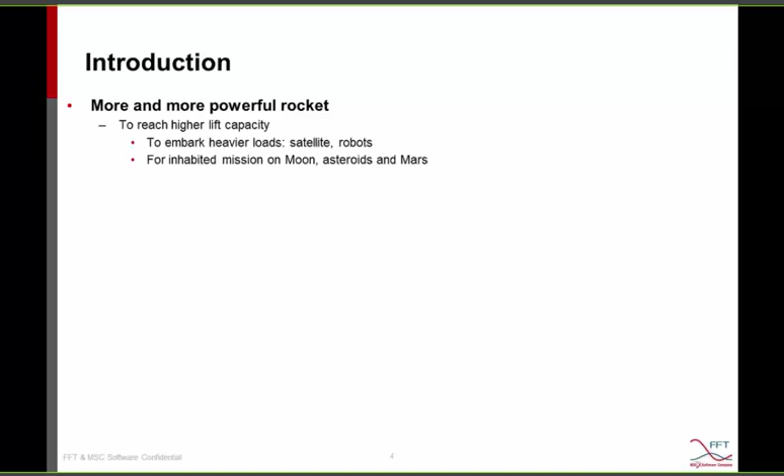Because the aerospace industry is very diverse, with a multitude of commercial, industrial, and military applications, and for competitive reasons, more and more powerful rockets are required in order to reach a higher lift capacity or in order to go further in space. For that reason, the launch is a determinant point to leave the Earth, and very high pressure levels are generated around and in the vehicle.

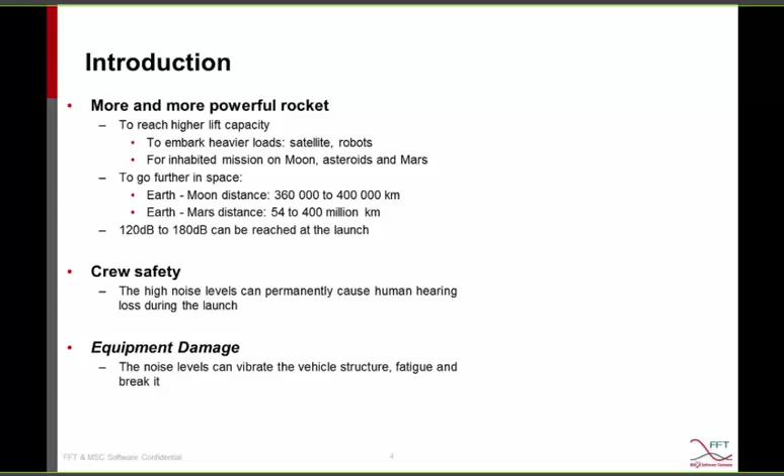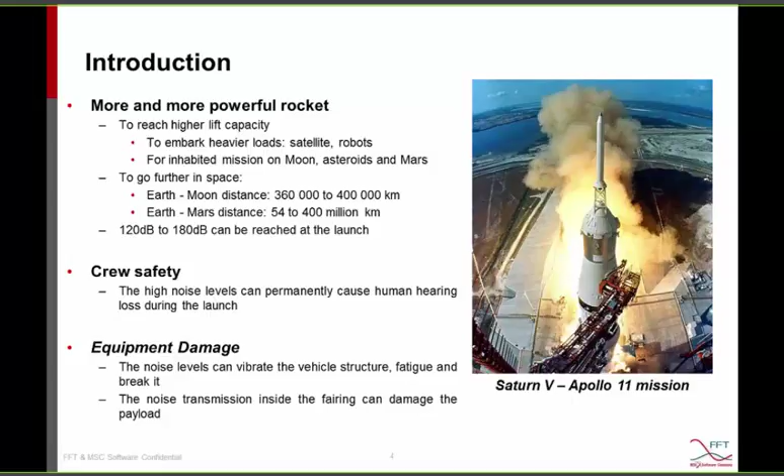120 to 180 dB can indeed be reached at liftoff, impacting the health of the crew, because such acoustic levels can permanently damage the human ear. In addition, it submits the structure of the launcher and the high technology components embarked to intense acoustic fields. These induced vibrations can first damage the vehicle, but also the payload components. So the main challenges of the aerospace industry are therefore to model vibro-acoustic problems and predict the vibration levels of structures submitted to intense pressure loads.

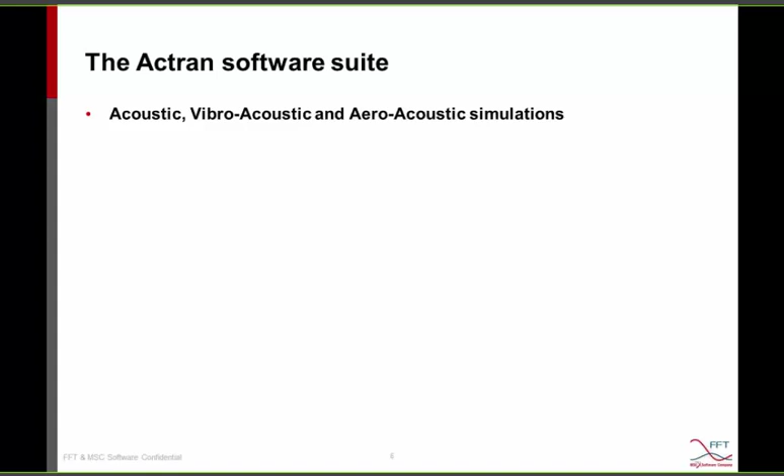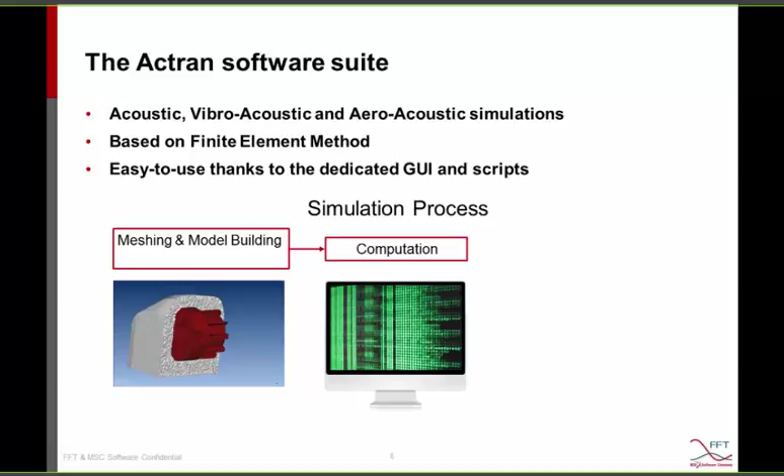As a perspective, I first want to show you that Actran is a dedicated tool for the aerospace industry. Actran is indeed a dedicated tool for pure acoustic, vibro-acoustic, but also aeroacoustic simulations. Based on the finite and infinite element method, the software is easy to use thanks to a dedicated graphical user interface called Actran VI that is constantly improved and for which every action can be registered and scripted in dedicated sessions. The simulation process starts first with the mesh and the model building, for which we include meshing functions. Then, this is followed by the solver, in which high-performance computing solutions can be used for reducing the cost of the computation. Finally, the post-processing is available in the same graphical interface, where a lot of operators and outputs can be displayed.

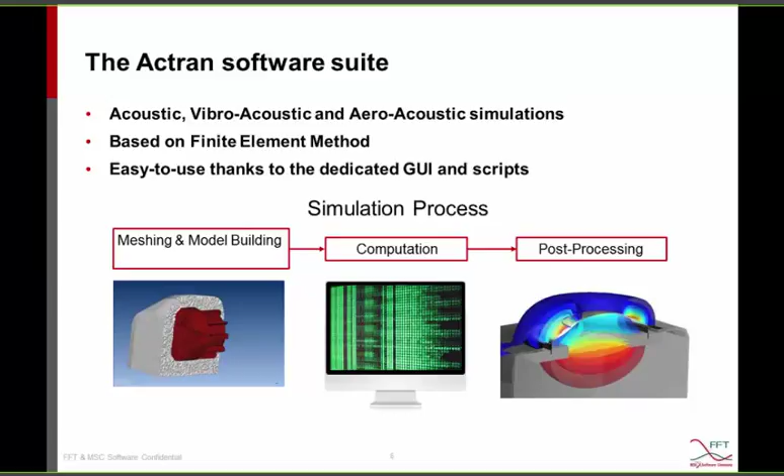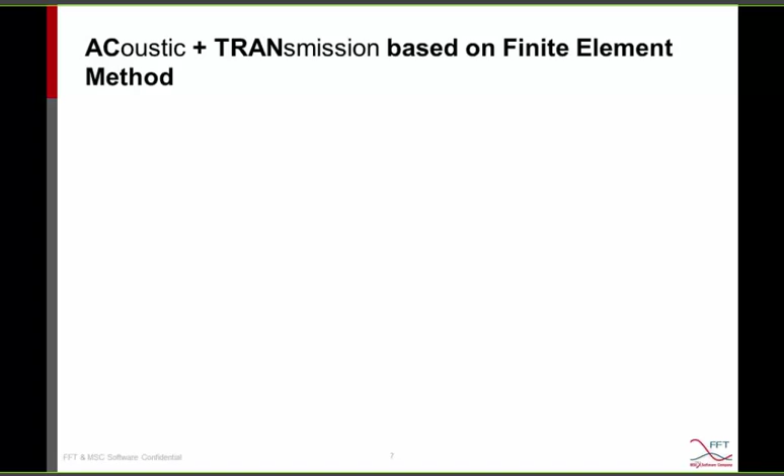To go further, Actran stands for acoustic transmission based on finite element method. Firstly, the fluid is modeled with volume elements for the near-field representation, and free-field radiation conditions are available. First, the far-field can be modeled with infinite elements, and secondly, a perfectly matched layer is also available for reducing the cost of the model, especially at high frequencies. Complex structures can be included in a fully coupled model with light or high damping, including a single layer or several layers. Composite materials are also available for which the properties of each ply can be defined separately, and finally connection elements can also be used.

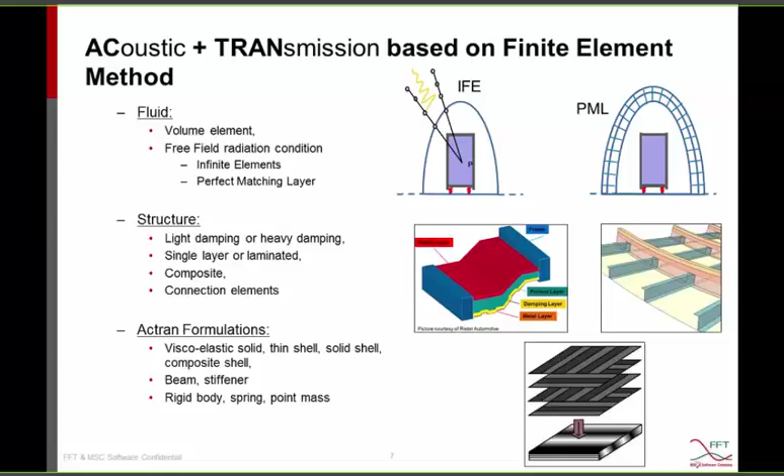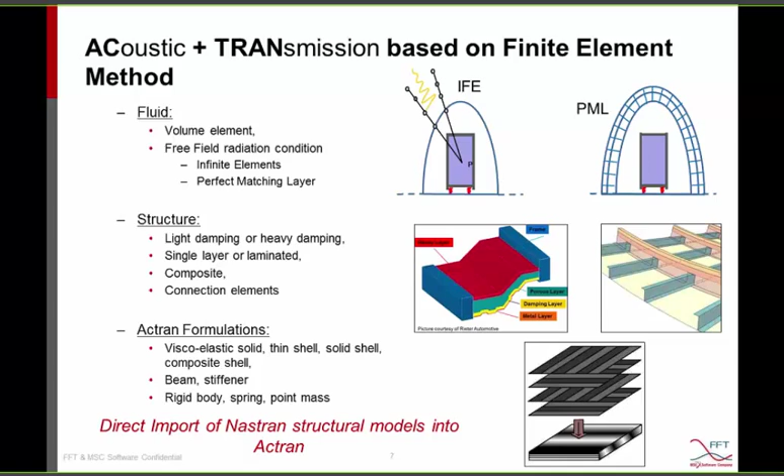Regarding the Actran formulations, different solutions are available like viscoelastic solids, thin shells, solid shells or composite shells. Beams and stiffeners can be modeled, and rigid bodies, springs and point masses are available with the same formulation as MSC Nastran cards. As an important remark, the dedicated tool Nastran to Actran allows to directly translate a Nastran analysis into an Actran model.

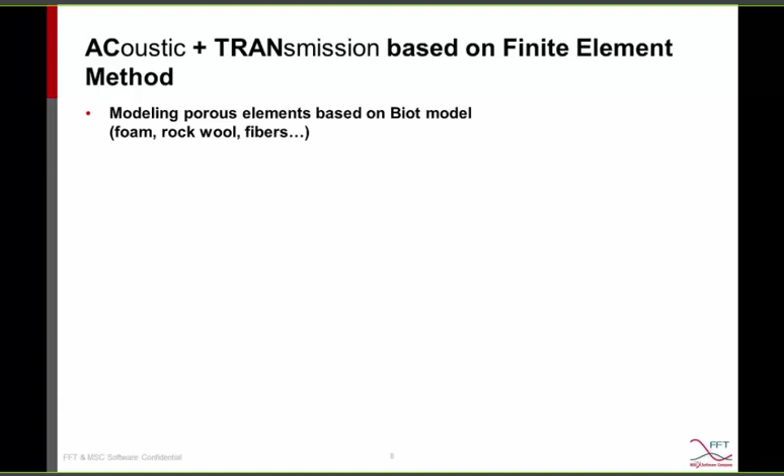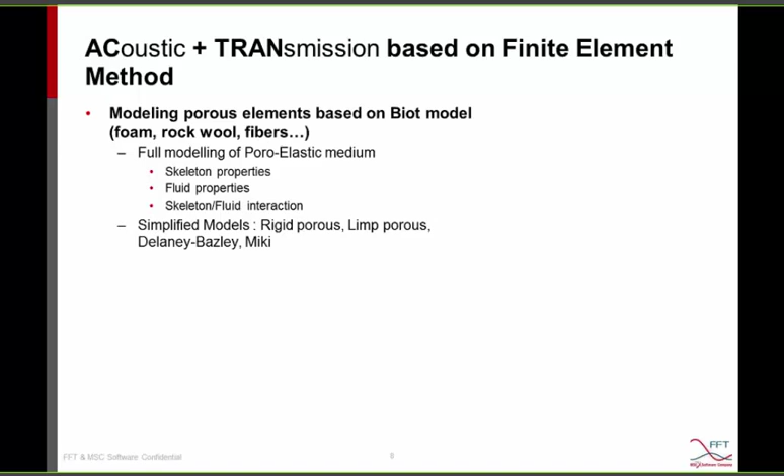Specific to the acoustic modeling, Actran includes porous elements based on the Biot model for representing foam, rock wools, or any other type of porous medium. Both the full modeling, including skeleton and fluid interaction, and simplified models are available depending on the material properties of the porous medium. In addition, isotropic, but also anisotropic materials can be modeled. The dissipated power is accessible in each porous medium, allowing to easily access the percentage of the dissipated power in a multilayered material. Finally, any type of material properties can be frequency dependent, and therefore fit experimental measurements of the porous medium properties.

So in general terms, Actran is the dedicated tool for vibro-acoustic problems. And now I'm going to show what the vibro-acoustic challenges for aerospace applications are and what to do for modeling them. I'm going through the different types of external noise sources and the corresponding challenges in the numerical modeling. First, an exterior acoustic field is generated at liftoff due to the engine noise. This excitation can be seen as a broadband and random acoustic pressure. This excitation is equivalent to a diffuse field, actually.

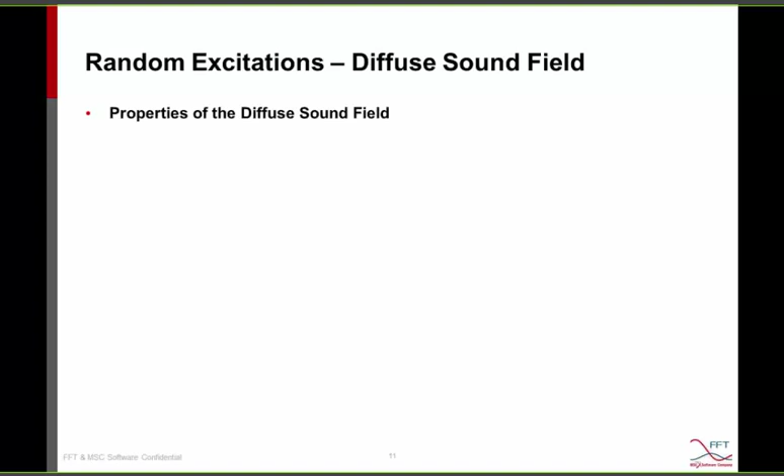The diffuse field is a random process for which the mean square pressure is the same at any point in space. In addition, for the flow of acoustic energy, all directions are equally probable. This excitation is equivalent to the acoustic field generated in a reverberant room by an omnidirectional source, for instance.

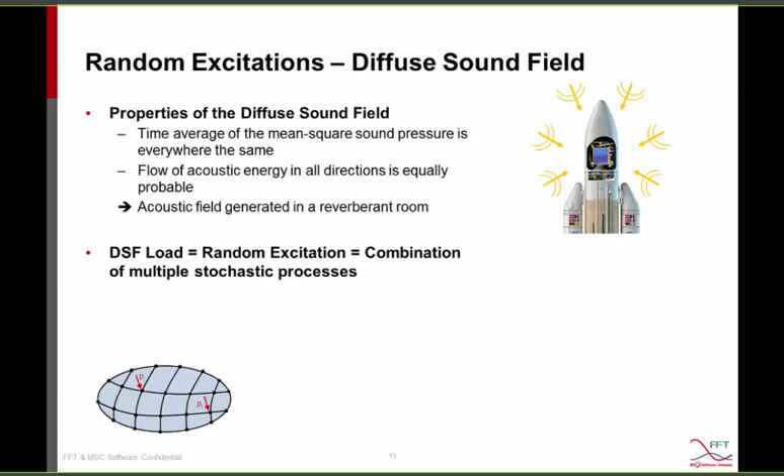For the numerical modeling, the diffuse field excitation along the external surface of the structure is applied to all the points of the finite element surface. And it is made of a combination of stochastic processes. Firstly, a reference spectrum is defined in terms of PSD spectrum, and this one can be frequency dependent. Actran is also compatible with sound pressure levels available directly from measurements. Secondly, cross-PSD functions represent the interdependency between the processes using analytical formulations. So the global diffuse field is made of these two representations.

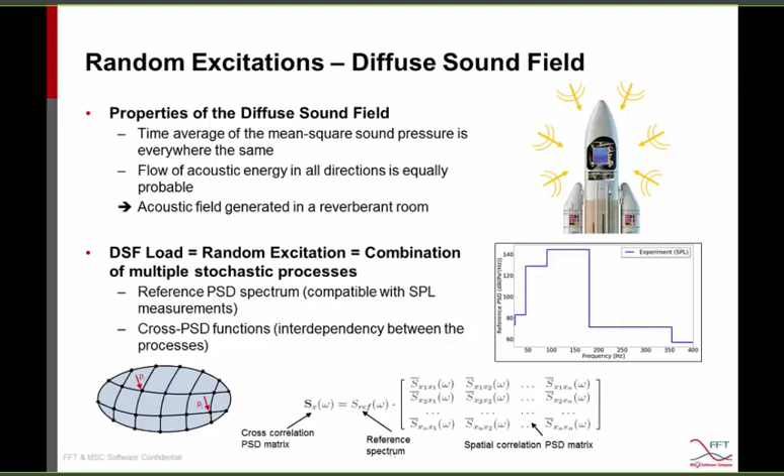Then, the second source of vibration is not acoustic this time, but is an aerodynamic load due to the pressure fluctuations along the vehicle. These ones come from small turbulent fluctuations in the boundary layer, which are predicted with a turbulent boundary layer model. As a second type of random excitation, Actran includes turbulent boundary layer models.

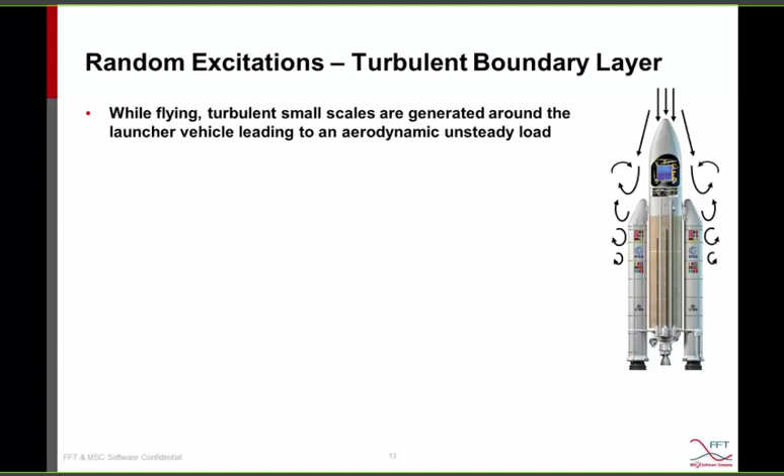Indeed, while flying, turbulent scales, which are small, are generated around the launcher vehicle, leading to an aerodynamic unsteady load. These pressure fluctuations are transmitted inside the fairing via the structure. The turbulent boundary layer is actually modeled like the diffuse field I just described previously, and is also seen as a combination of multiple stochastic processes based on reference PSD and cross PSD functions.

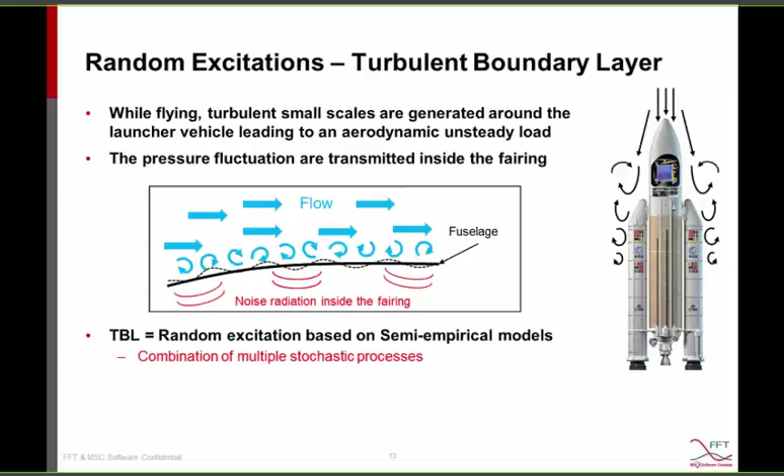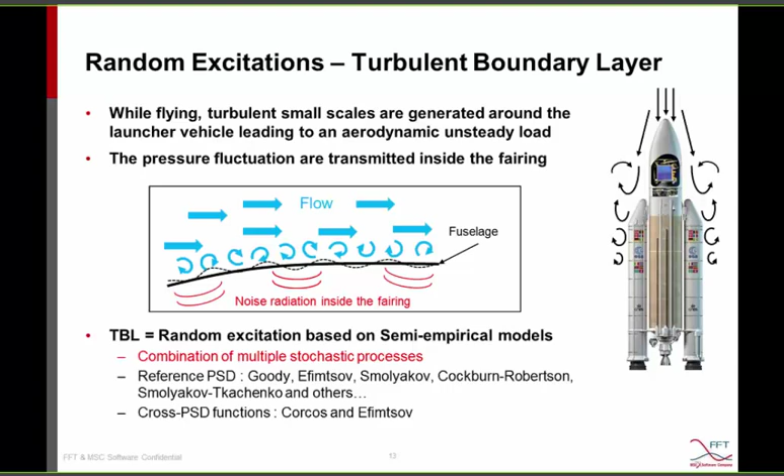The difference is that the TBL relies on semi-empirical models. I provide a list of the reference PSD models available in Actran. The Cockburn and Robertson model is especially based on experiments of spacecraft panels subjected to in-flight fluctuating pressures. On the other hand, the cross-power spectrum comes from the spatial correlation functions, either described by the Corcos or Efimtsov model.

Finally, the third type of external source is the structure-borne noise due to the structure vibration and the acoustic transmission. For that purpose, the acoustic insulation performances can be predicted via transmission loss and noise reduction index studies. In addition, the vibration levels and the induced constraints can be predicted and coupled to an acoustic fatigue analysis.

Now, if I have a look inside the fairing, I also remark that the carry-on component should be studied carefully. Indeed, all the types of external sources described previously are transmitted inside the fairing, and the embarked satellite, for instance, is also submitted to intense acoustic fields. The first specific modeling challenge inside the fairing is therefore to represent a broadband random acoustic pressure that includes, in that case, some specific masking effects.

Indeed, the position of the embarked component inside the fairing has its importance on the repartition of the pressure field along the structure surface. The masking effect is actually due to the installation effects, and the diffuse sound field I described previously cannot be directly applied along the whole satellite surface. I take a small example to have a look at an arbitrary geometry placed in a reverberant room. Because of the geometry of the structure, there are external surfaces that are not loaded by the incident acoustic field. These surfaces are masked because of the geometry of the structure.

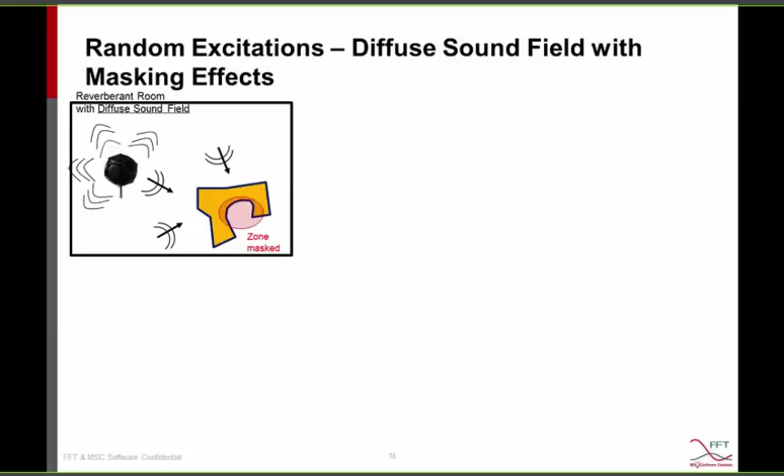The diffuse sound field excitation in Actran actually makes the distinction between the conventional model and the diffuse sound field including masking effects. In the conventional model, described in the previous slides, the excitation is applied directly along the external surface of the structure. The reference PSD and cross PSD are described by analytical formulations without taking into account the masking effects. To include the masking effect, the surrounding fluid should be modeled with finite elements.

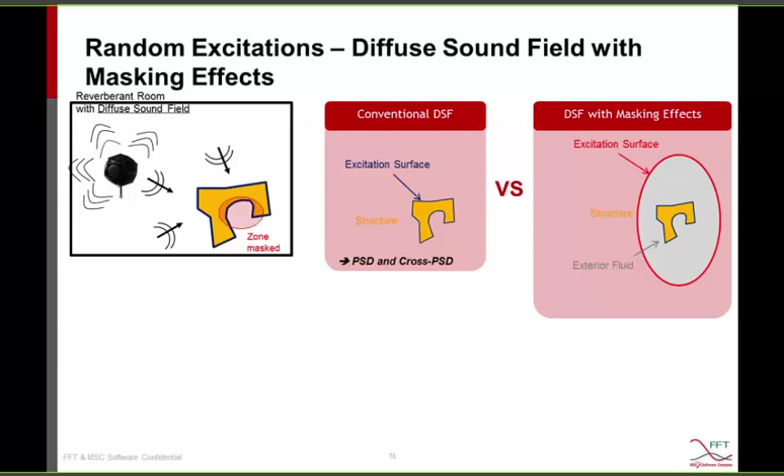The diffuse sound field excitation is then applied along the infinite surface, and for that purpose, the diffuse sound field is represented by a superposition of a high number of incident plane waves with different orientations. The generation of the plane waves is automatically done around the structure and equally spread around a reference sphere. The random character of the excitation is then modeled by sampling random phases of the excitation.

The random excitation therefore becomes the combination of different deterministic results for which the phase of the plane waves changes. One realization of the random process provides one result, and the PSD values are obtained by summing the squared results. Therefore, the convergence of the PSD result depends on the number of samples considered during the Actran computation. I draw your attention to an important point with the sampling process. Only one Actran calculation is needed thanks to the multiple load analysis.

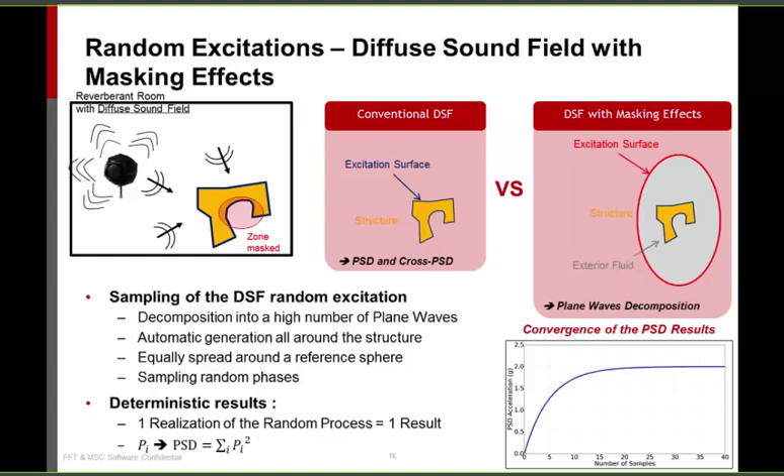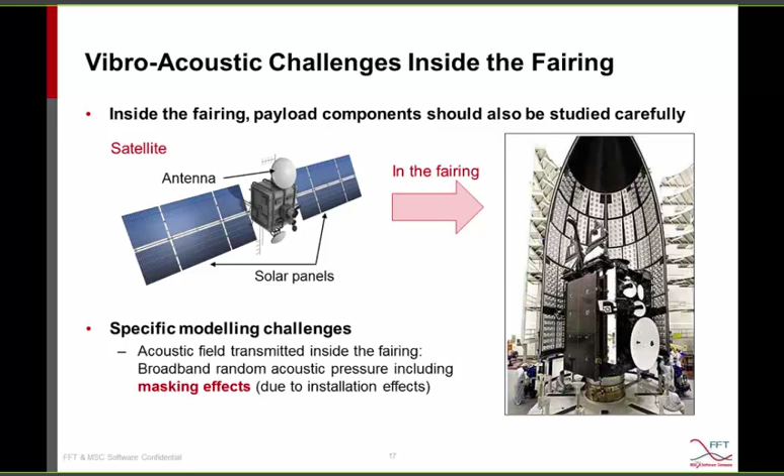The second specific modeling challenge inside the fairing concerns the viscothermal effects induced in thin air layers. Indeed, neglecting the viscothermal effect could lead to an overestimation of the acoustic pressure excitation along the structure and therefore predict high vibration levels and maybe the structure break, although the structure was originally well dimensioned. When the dimension of the problem becomes very small compared to the acoustic wavelengths, viscous and thermal dissipation actually occurs in the fluid. The acoustic waves are locally slowed down and damped out, and these effects are important in small cavities or thin air layers.

The main challenges of the numerical modeling are to be able to compute these effects in arbitrary geometry with an efficient computational process. The distance-based linearized Navier-Stokes Fourier model should be used for any type of 3D geometry at rest. It makes an approximation of the viscous field using a pre-computed wall distance field. The first step computes the wall distance field, which is very rapid inside Actran, and the second step computes the acoustic propagation, including the viscothermal losses.

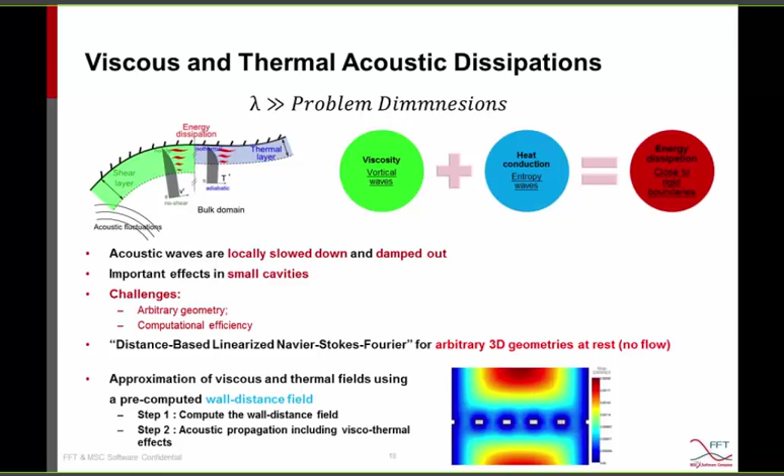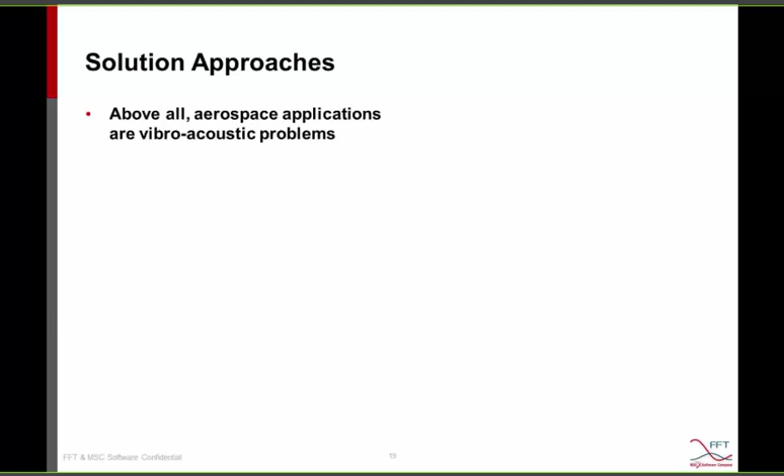So I have demonstrated that, above all, aerospace applications are vibro-acoustic problems with numerical modeling challenges. Once the numerical model is built, there are different solution approaches for solving it. First, the direct frequency response is useful for complex and high structural damping models, including porous materials, for instance. This approach better suits predicting the acoustic transmission performances of multilayer materials because of its cost.

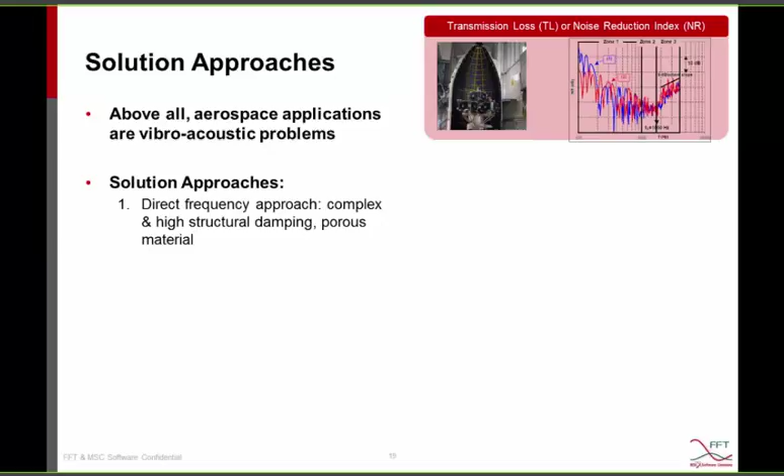The modal frequency response is useful for reducing the cost of direct computation and solving large structures with low damping and without porous media. Finally, the hybrid frequency response merges the benefits of the direct and the modal approaches for solving a fully coupled vibro-acoustic problem, including the modeling challenges specific to the aerospace applications.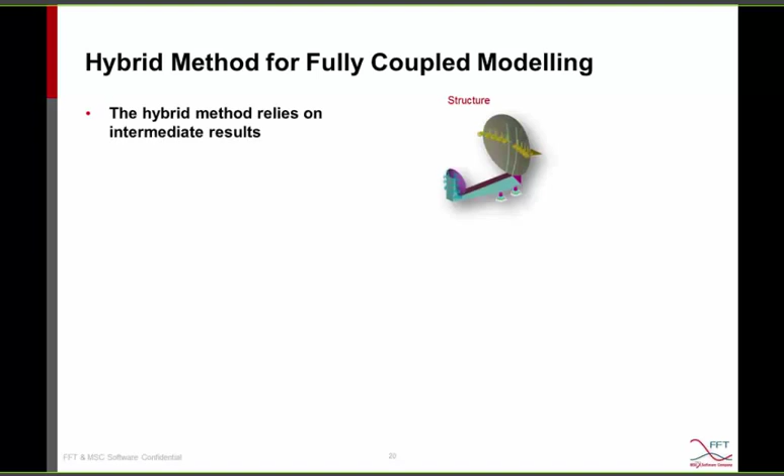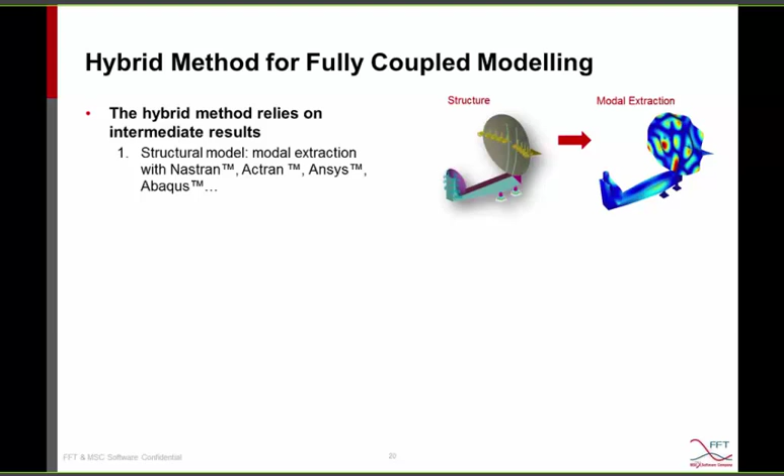To see in deeper detail what the hybrid method in Actran is, it actually relies on intermediate results provided by external tools for modeling the structure. The structure is in the modal coordinate system thanks to a modal extraction analysis that can be performed with external tools like Nastran, ANSYS or Abaqus. The structure is then imported in Actran and the model is made more complex by including specific acoustic excitations and components. For instance, viscothermal effects and masking effects are included in the Actran analysis and modeled in the physical coordinate system.

Finally, a hybrid calculation is performed with Actran for a fully coupled vibroacoustic study, including a structure in the modal coordinate system and acoustic components in the physical coordinate system. Thanks to our automatic and adaptive acoustic components, the exterior field is not necessarily meshed by the user. Indeed, included meshing tools are available in the graphical user interface and in the Actran solver.

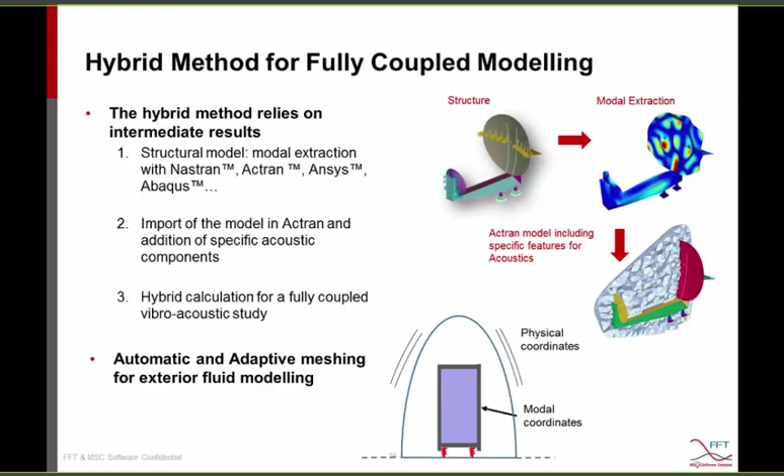I make a small parenthesis about the simulation process for acoustic fatigue that could be useful for aerospace applications. The output of the Actran computation, resulting from a modal frequency response including a diffuse sound field excitation, could be used in the MSC Fatigue software for computing the durability of inner components based on the predicted stresses.

Two case studies are presented in this section. The first case was studied in collaboration with EADS. It consists in modeling the equipment bay of the Ariane 5 vehicle submitted to a diffuse sound field in the modal coordinate system, and we compare the predicted vibroacoustic response to experimental measurements at several accelerometer locations. We published a paper at the ECSSMT conference where we demonstrated a very good correlation with the measurements up to 2000 Hz.

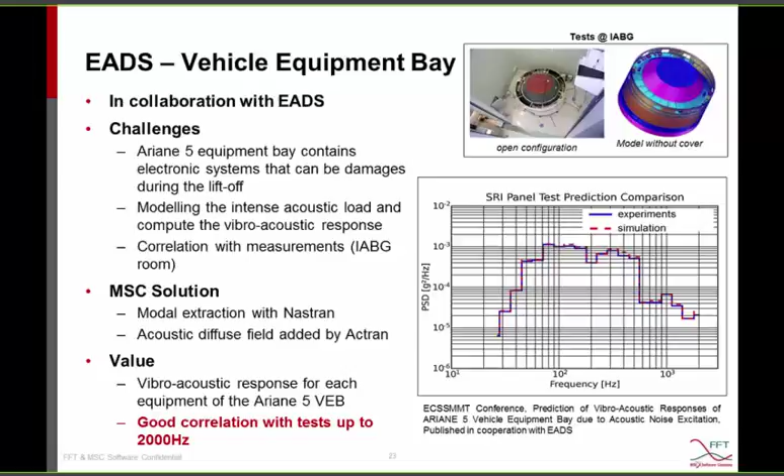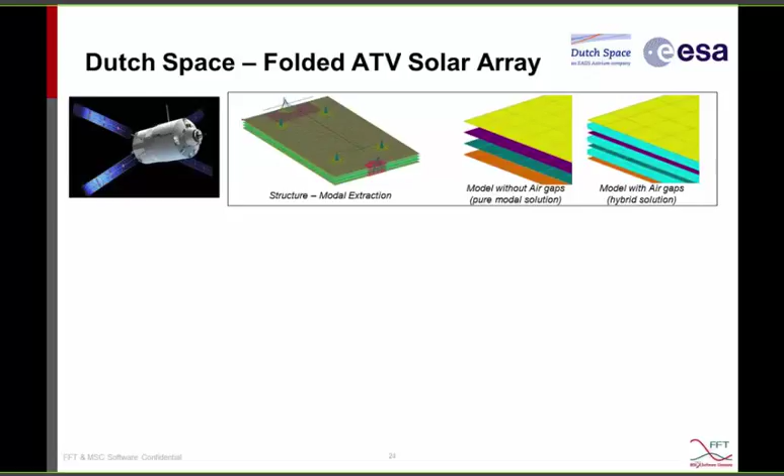The second case was studied in collaboration with Dutch Space. It consisted in modeling the structure of the folded solar panels inside the fairing. A modal extraction of the structure was performed, and we compared the results without and with the modeling of the viscothermal losses in the thin air layer present between the panels. The diffuse sound field was applied along the structure's surfaces without masking effects at first, and two types of boundary conditions along the free surface of the air layers were studied.

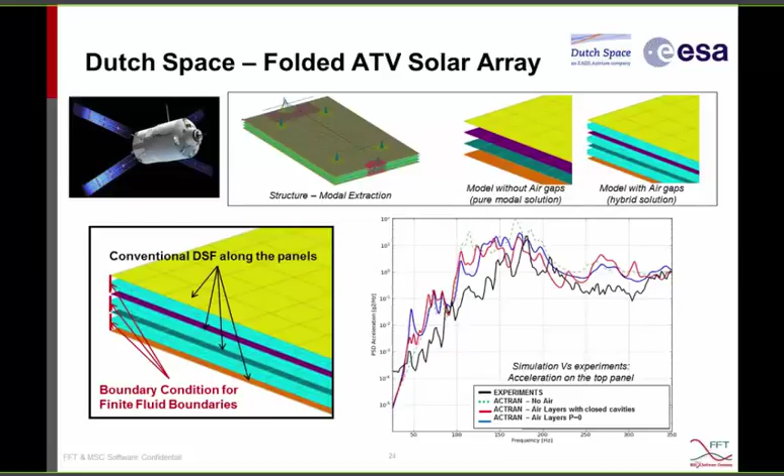We first identified the influence of the air layer modeling that reduced the vibration levels measured at the acceleration points. So with the air layer, let's look at the blue curve, compared to the model without viscothermal losses, that is the green curve. However, the first results were originally high compared to the measurement in black, even if we identified that the viscothermal effects have their importance.

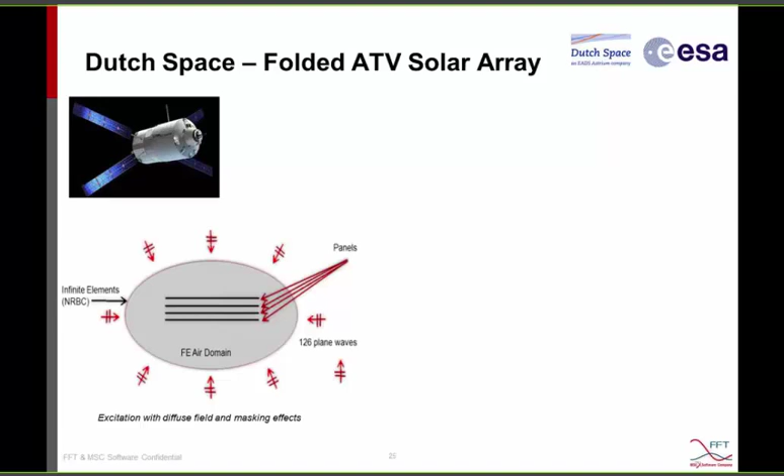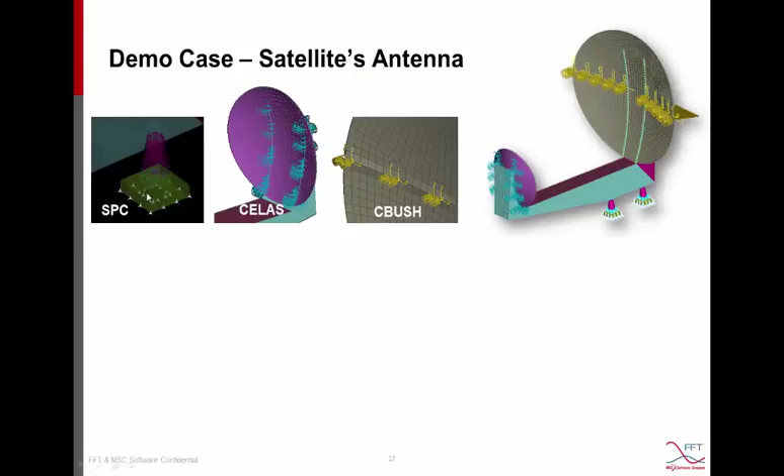As a demonstration case, I have chosen a simplified antenna for illustrating how to model a fully coupled vibroacoustic problem, including masking effects in the diffuse sound field excitation. The antenna is first modeled in MSC Nastran and contains different components. Shells and composite properties are used for modeling the structure in 2 dimensions. Connection elements are included with CELAS and CBUSH cards. And the degrees of freedom are fixed with SPC cards that constrain the displacements and rotations to 0 for ground nodes.

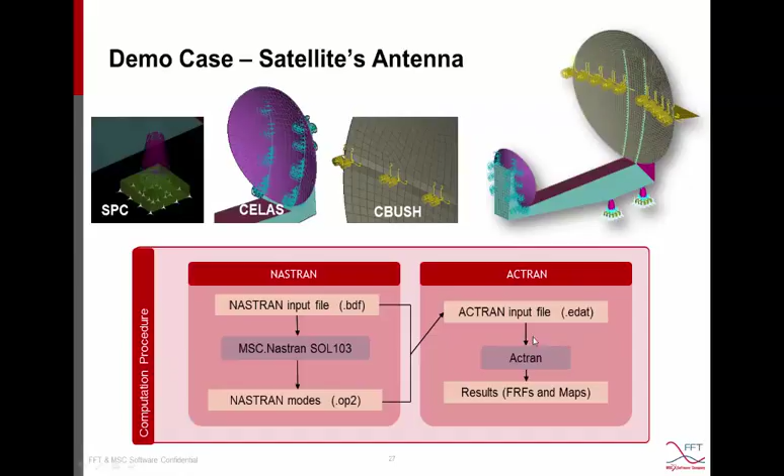The modal extraction is performed with MSC Nastran using a SOL 103. The modes are stored in an OP2 database that is called the modal basis. This modal basis is then included in an Actran computation in which specific features for acoustic modeling are used. The Actran model therefore starts from the Nastran modal basis and the Nastran mesh of the structure, and the structure is fully represented in the modal coordinate system.

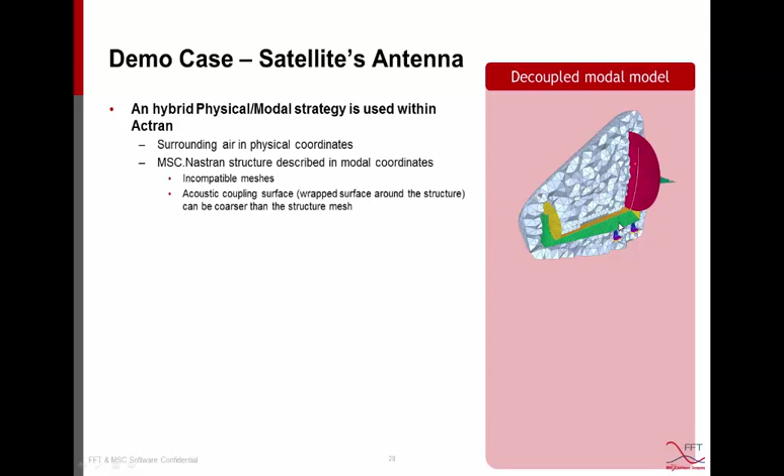A hybrid physical/modal strategy is used for modeling the surrounding air and the far-field condition. Then the coupling between the structure and the finite elements of the surrounding acoustic domain is ensured thanks to a non-compatible interface. The diffuse sound field is then applied along the infinite element surface with the resultant pressure of a high number of plane waves. The fluid reaction on the structure plus the masking effects are therefore well accounted for using this strategy.

I draw your attention to the Actran meshing capacities that allow you to directly create the acoustic mesh from Actran VI, or to use the dedicated exterior fluid components that automatically build the exterior fluid domain during the Actran calculation. For further information, I invite you to have a look at the dedicated webinar about adaptive acoustic radiation analysis with Actran.

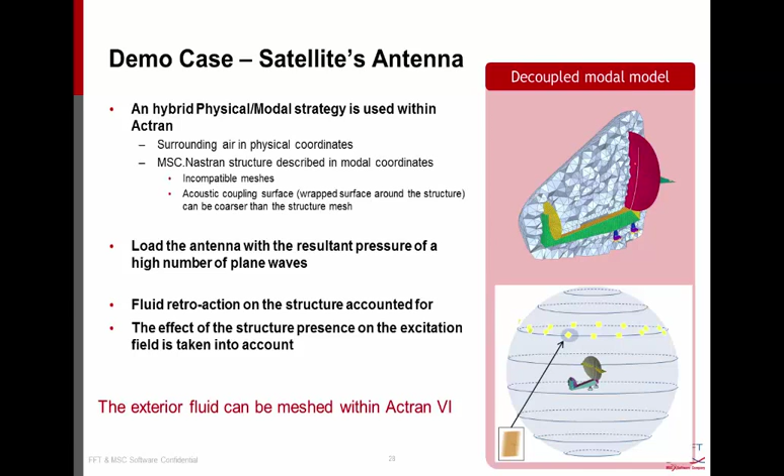For simplicity reasons, I am loading directly the full vibro-acoustic analysis inside Actran VI to show you the analysis content. In Actran VI, the data tree panel on the left side of the graphical interface is organized in several nodes. The first node, the topologies node, contains the finite elements, which means the mesh of the analysis. In this one, we have first the mesh relative to the structure and the mesh related to the external fluid.

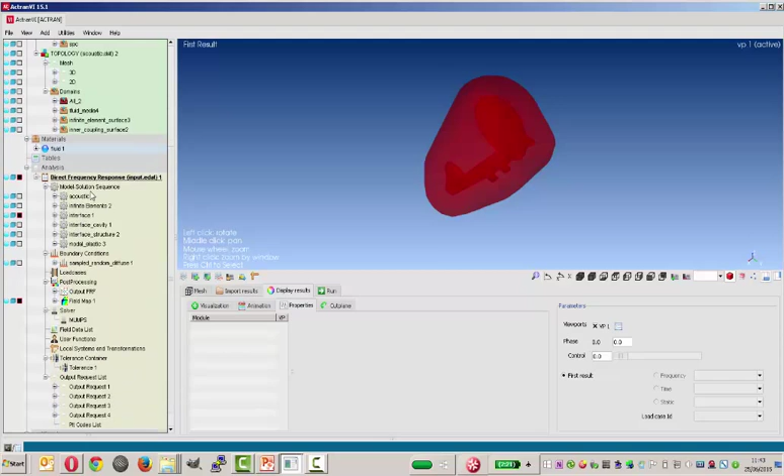The analysis node then contains the Actran analysis, which is a direct frequency response in this example. Here are described the different components of the analysis, the boundary conditions, and the post-processing operators.

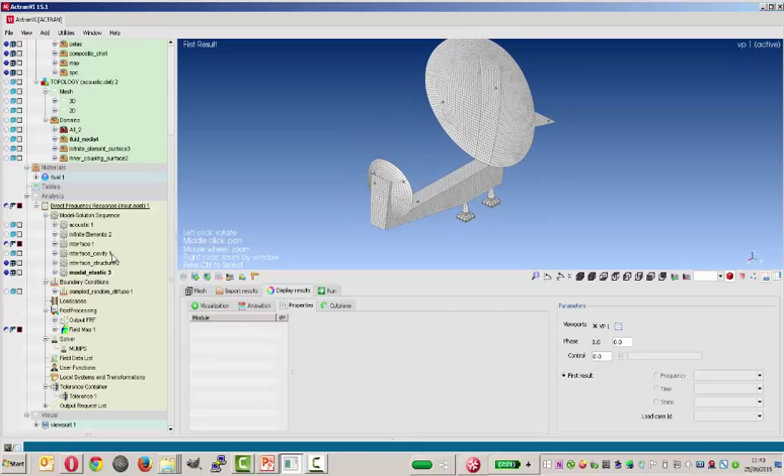A global damping coefficient is applied to all the modes and done on the stiffness matrix in the example. The component points to a domain that allows linking something from the analysis to the topology. In this modal basis component, the domain refers to all the element sets of the structure, no matter their dimension.

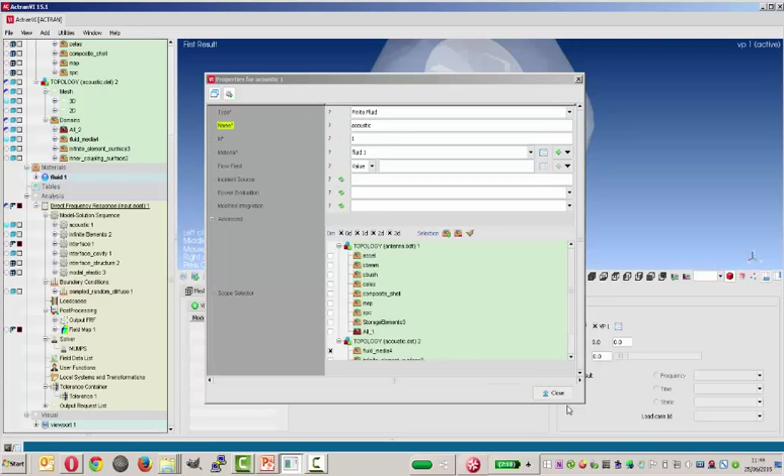Then, the surrounding acoustic domain is represented in a finite fluid component that refers to fluid materials in which the default properties of the air at 18 degrees are used. Then the component relies on the domain in which the 3D element set is defined.

For the non-reflective boundary condition, infinite elements are defined along the external boundary of the finite fluid, and these infinite elements are characterized by a coordinate system for which we fix the center and the system of axes. Then the interpolation order drives the accuracy of the infinite elements for representing the far field.

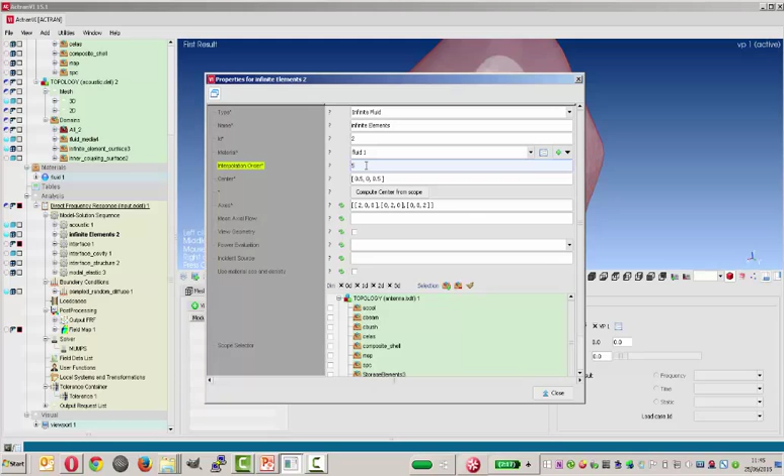In order to couple the acoustic component to the modal elastic component, we use what we call an interface. The interface allows propagating the degrees of freedom from the structure to an acoustic boundary condition, and conversely, for taking into account the retroaction effects.

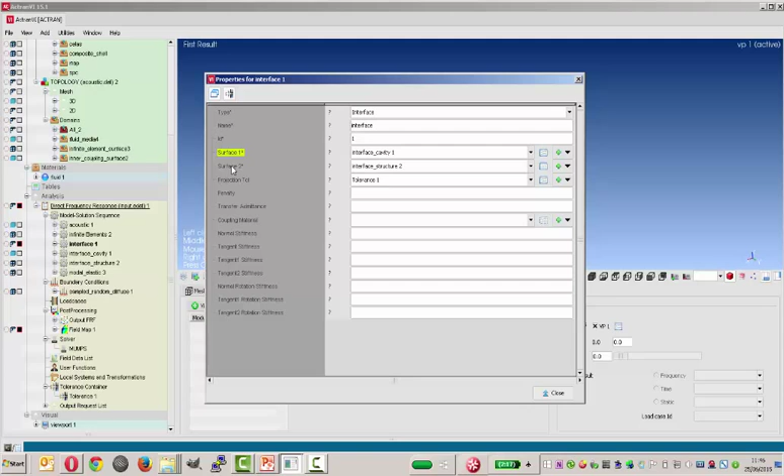The interface relies on two coupling surfaces, one for the structure and one for the acoustic. These coupling surfaces are also defined in the model, relying on specific element sets. For the structure, it is actually the same mesh as the structure mesh.

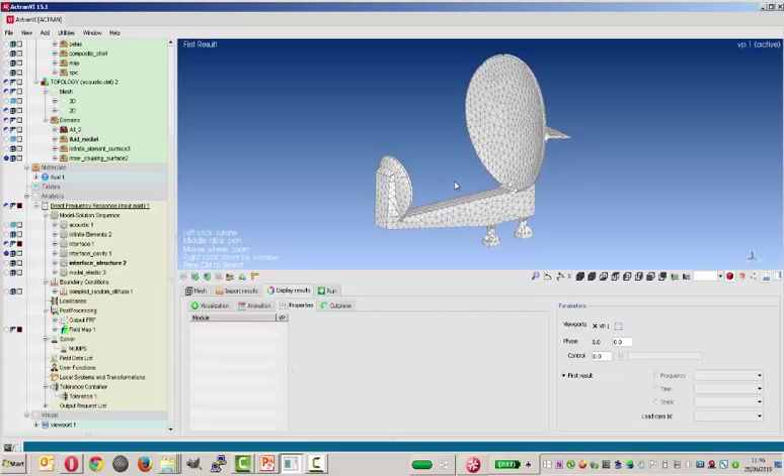For the acoustic coupling surface, it represents a wrap of the structure surface and is actually the skin from which the volume elements built around the structure start. The wrapping of the structure could be directly done inside Actran VI thanks to the shrink wrap function.

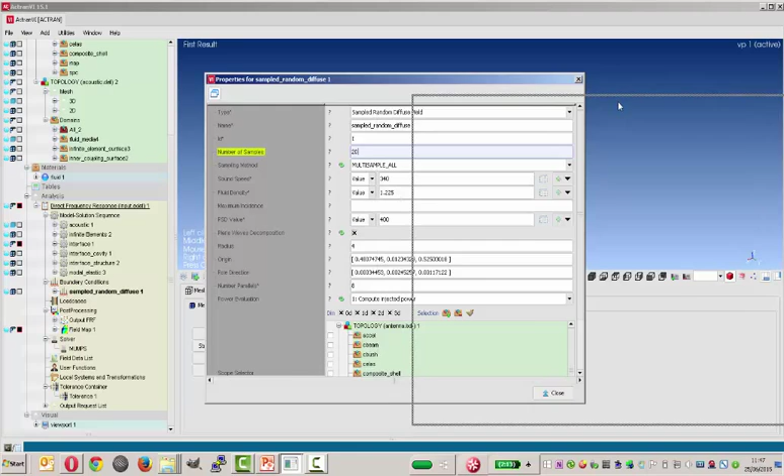As an excitation, we apply a sampled random diffuse field along the infinite surface. The diffuse sound field is made of a plane wave decomposition that is activated, for which the plane waves are generated thanks to a reference sphere, which is characterized by its radius, its origin, and pole direction.

And we sample the excitation into 20 different samples of the phases of the excitation. So remember, it's a random excitation that is represented with several deterministic results, and the convergence of the calculation is ensured after a certain number of samples.

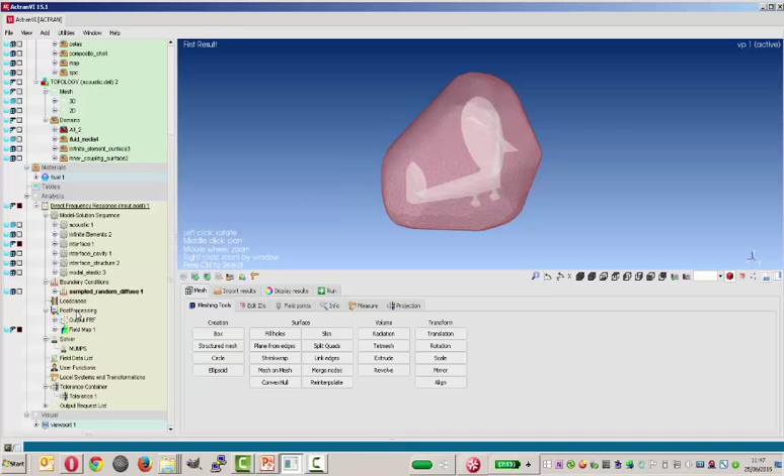Once the analysis is done, I can define the different post-processing components. So there is first an output frequency response function that allows writing the frequency response functions in the PLT file. There is one for the deterministic results and one for the PSD results, which is actually a combination of all the different load cases contained in the FRF file.

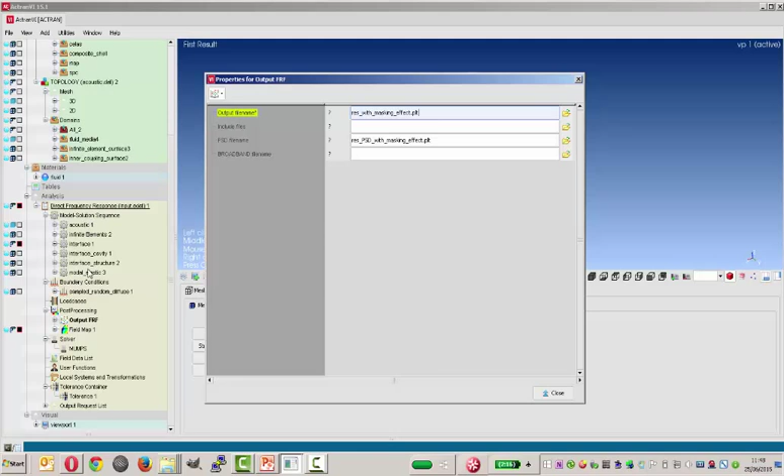By default, the file contains the global quantities over all the domains used in the analysis, which are quadratic quantities. Then post-processing components can be used in order to output local indicators. First, accelerometers are defined at certain points along the structure.

So if I have a look, I can show the location of the accelerometers there. You can see them here. So I request the solid acceleration in G unit in the example.

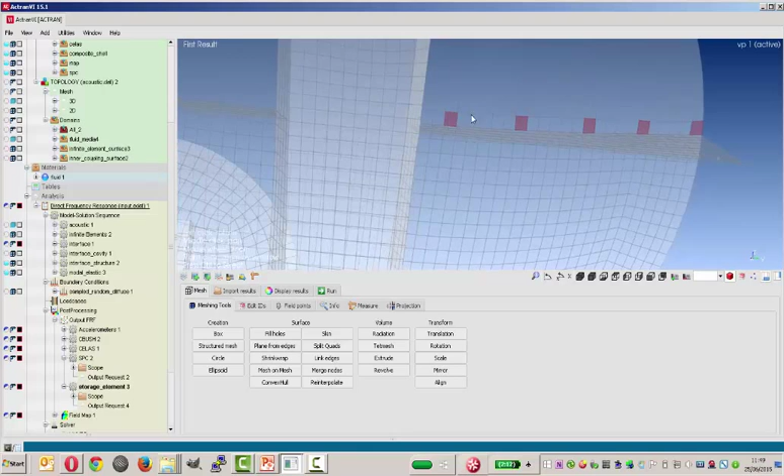Then I also output in the CBUSH and CELAS elements the element forces in these 1D element sets, and I look at the resulting forces in the SPC nodes also. Finally, I define some storage elements, which are actually finite elements contained in the structure mesh and situated close to the connection elements, where I have a look at the von Mises stresses.

That's for the frequency response output. Then I also define a map that is requested to write down the von Mises stresses along the surface of the dish. The results are exported in an NFF database, and we output the results at specific frequencies that are defined in the properties of the direct frequency response analysis.

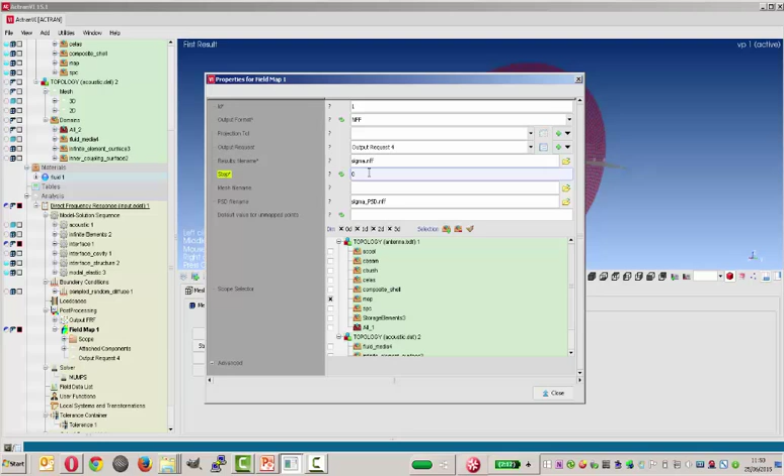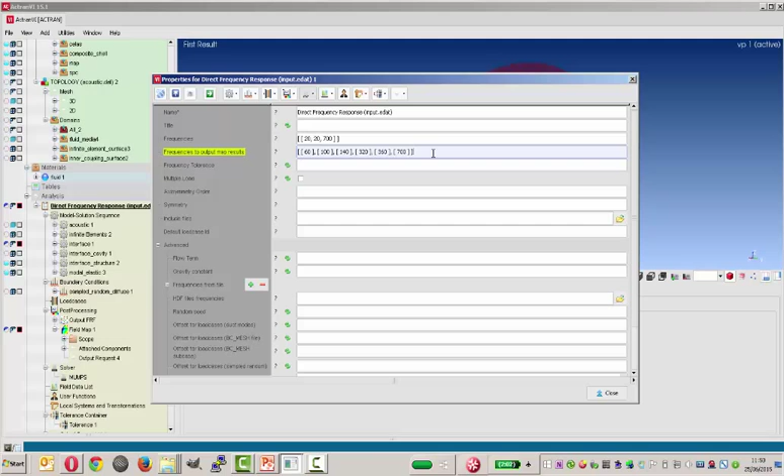So the global properties of the direct frequency response are specified directly here, where I can put the frequency range of the analysis that starts at 20 and goes to 700 with a frequency step of 20 Hz. There are also specified here the frequencies where the map is output, in order to reduce the amount of data written during the computation.

As an example, I can show you that since your Actran analysis is based on Nastran results, you can have a look at the modes first extracted by SOL 103. For instance, I can have a look at the modal displacements outputted by Actran. I can also plot the deformation in order to have a representation of the deformation.

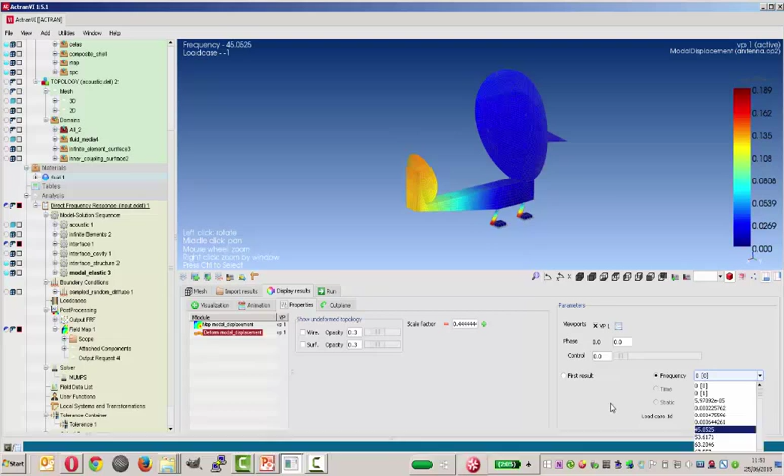Obviously all these results are available at all the eigenfrequencies of the modal extraction. It's also possible to make an animation of the structural vibration for a specific frequency.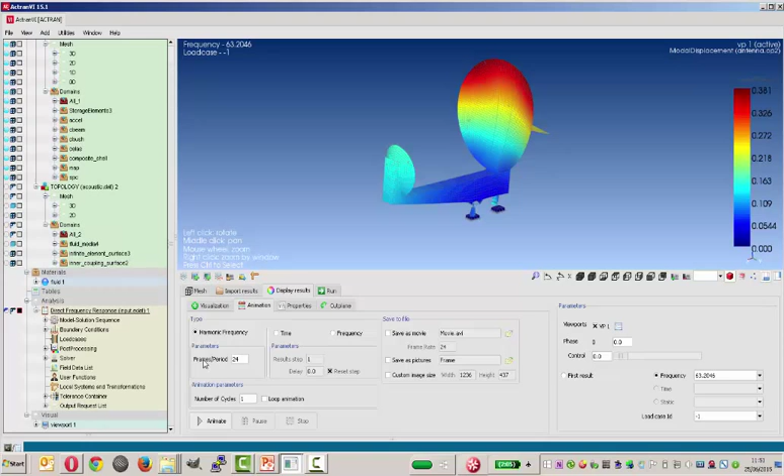A small parenthesis about how to visualize modal results in Actran VI directly. Once the model is completely defined, I can launch the computation directly from Actran VI.

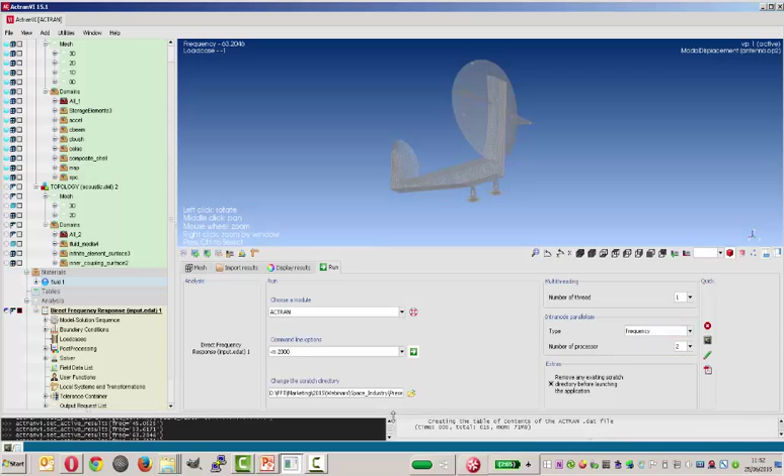I specify a memory consumption and eventually a frequency parallelism. The log of the computation is then displayed on the lower part of the Actran VI interface. For this demonstration, I killed the computation in order to show you all the results.

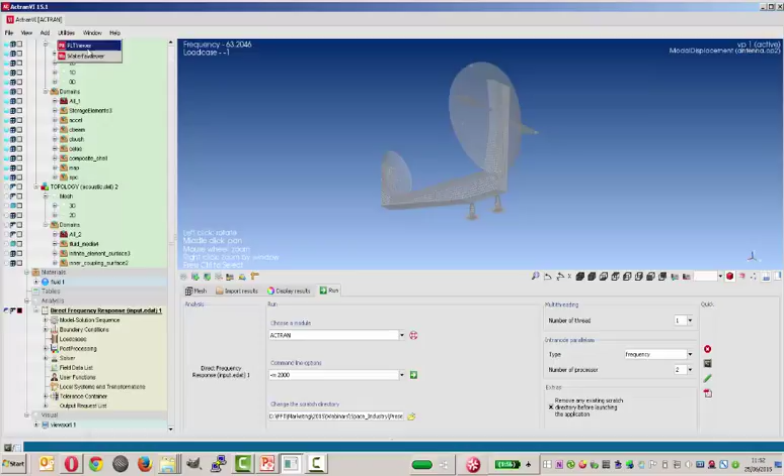First, I can have a look at the frequency response function. From Actran VI, I can access the PLT Viewer interface, which allows loading the frequency PLT file. In this example, I have prepared a session that allows retrieving directly a certain amount of results and plotting some automatically. So I can load the session.

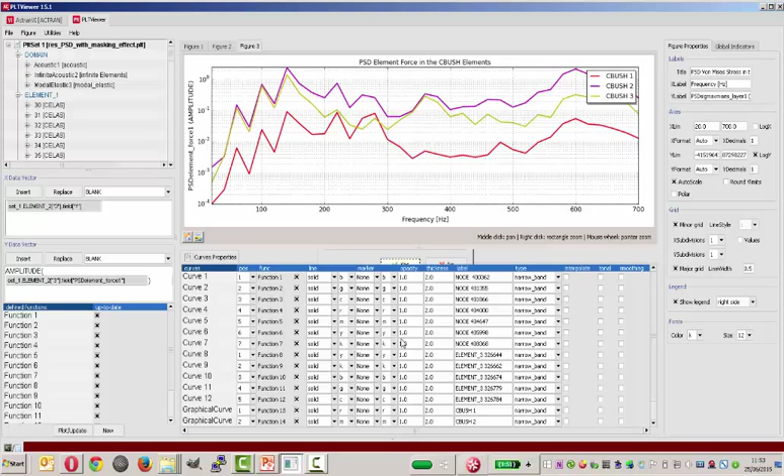Keep in mind that at any time you can retrieve your work, either from Actran VI or from PLT Viewer. In addition, you can also use the scripting capabilities for efficient pre- and post-processing operations.

In this example, I have plotted different types of results. The first figure shows the PSD of the kinetic power, which represents the global level of vibration of the structure. For instance, I can identify that at 100 Hz I have a higher value compared to other frequencies, meaning that globally the structure vibrates more at 100 Hz.

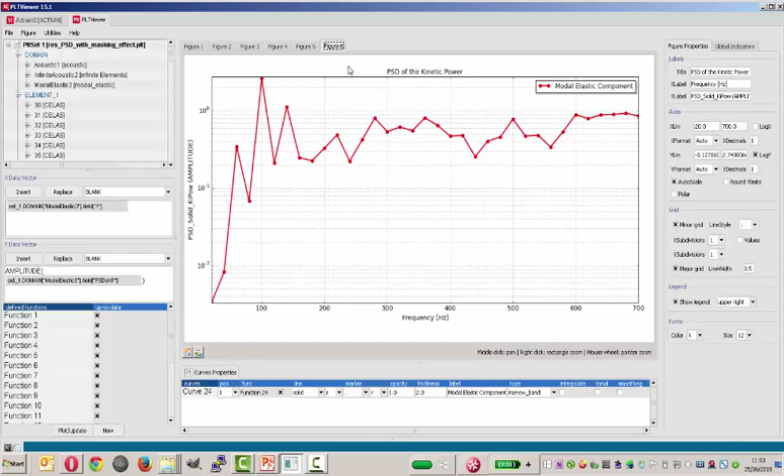Then if I look at local indicators, I can also retrieve the acceleration in G units for all the nodes at which I outputted the results.

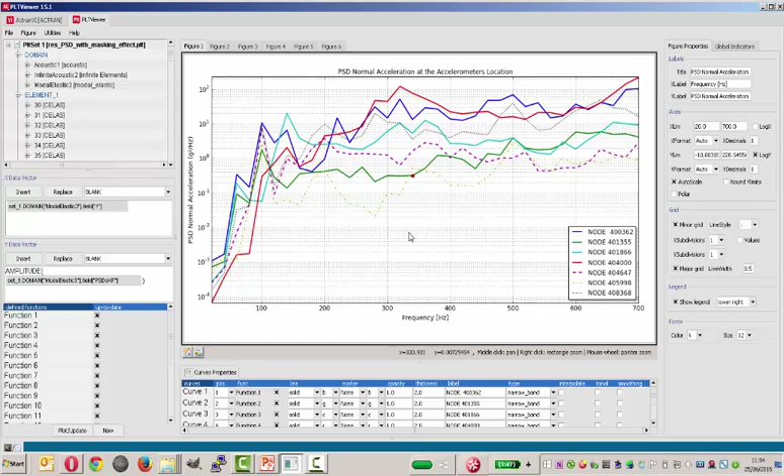I also plotted the von Mises stresses that I outputted on the first ply of the composite properties, output in some elements of the dish surface. I also output the element forces inside the CBUSH and CELAS elements. And finally, I also retrieve the forces in the SPC nodes.

In PLT Viewer, as in VI, you have a tree on the left side related to the results available in the PLT file imported in the viewer.

First, you can retrieve the results by domain, meaning you have global results, for instance mean square pressure in the acoustic components. Then you can retrieve local indicators, for instance the element force inside all the CELAS elements, or the element force inside all the CBUSH elements, then the von Mises stresses inside the composite elements of the dish, and finally the solid accelerations inside the accelerometers defined in the analysis.

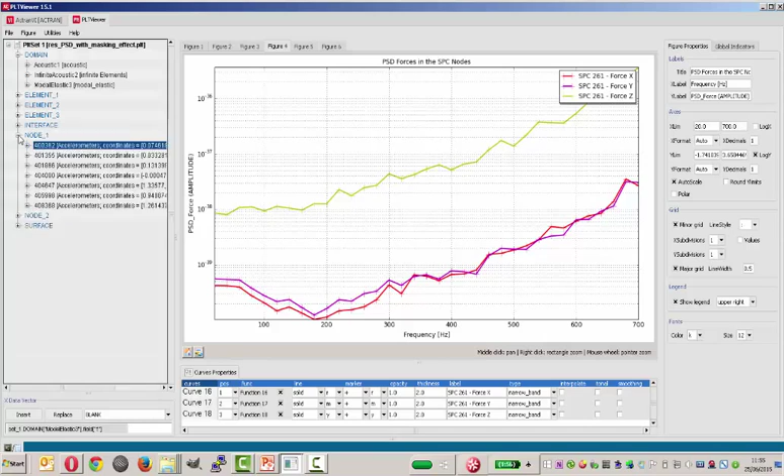That was for the frequency response function. Now, if I look at the maps, I can import the NFF database generated by the output map. For that, I import the NFF mesh, which is a mesh that also contains results. NFF is the default format for Actran.

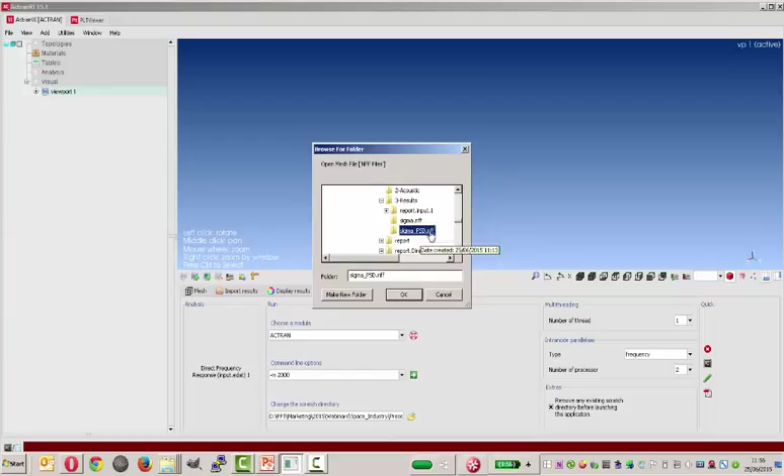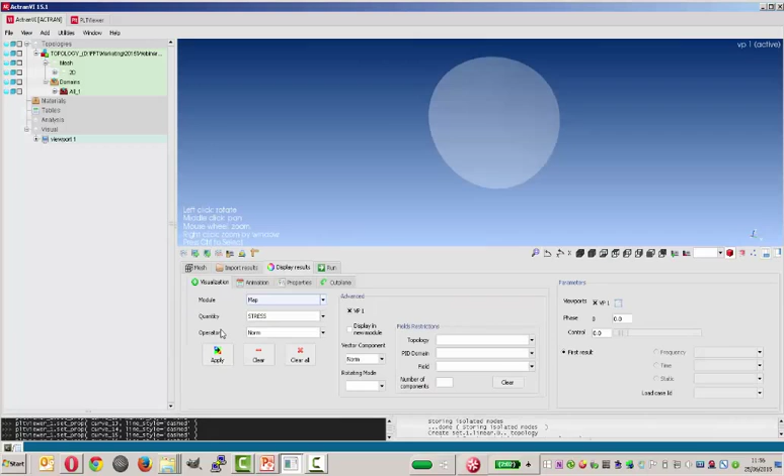Here I can import the results in terms of PSD. So I have the surface of the dish, and this contains the von Mises stresses I requested during the analysis. I can show the results in terms of norm as a map, not a deformation in this case, and I can use the log scale in order to have a better representation of the results.

The results are available at each frequency at which I wanted to output the results. By default, the results are outputted at all frequencies, but you can choose to specify only several frequencies in order to reduce the amount of data written during the computation.

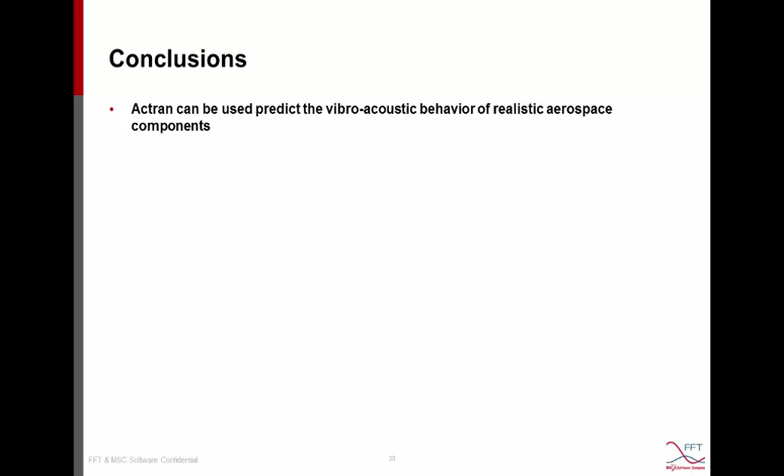To conclude about this acoustic webinar, Actran can be used for predicting the vibro-acoustic behavior of realistic aerospace components. Indeed, it includes vibro-acoustic features. The full vibro-acoustic coupling can be solved with different solution approaches, and the modal and hybrid strategies especially allow reusing existing modes exported by external tools.

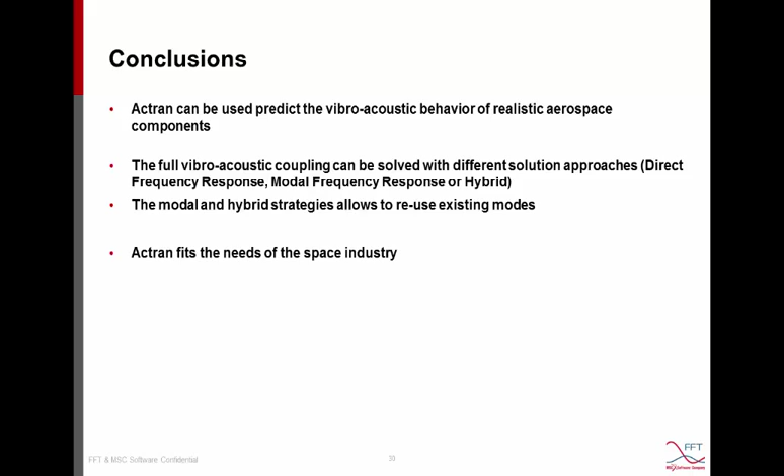Thanks to the hybrid strategy, Actran fits the needs of the space industry and allows including the modeling of a diffuse sound field, but also has a solution for accounting for masking effects. It also includes a unique solution for including viscothermal effects, very easily thanks to a two-step approach.

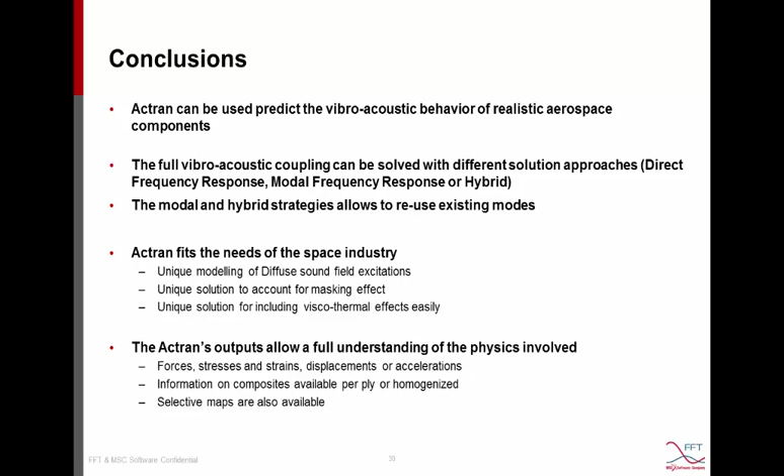The Actran outputs allow for a full understanding of the physics involved, thanks to the export of forces, stresses, strain, displacement, or accelerations, for which information on composite cards, for instance, can be available per ply or as homogenized quantity. Finally, selective maps are also available in order to reduce the amount of data written by the calculation.